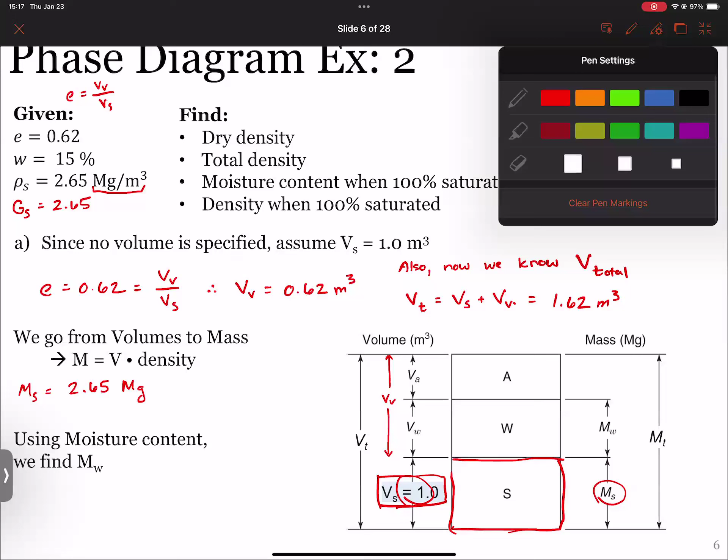We can find that one on that side, and then using our moisture content, we can find the mass of our water. Because now we know mass of solid, we know our moisture content is just the mass of our water divided by our mass of solid.

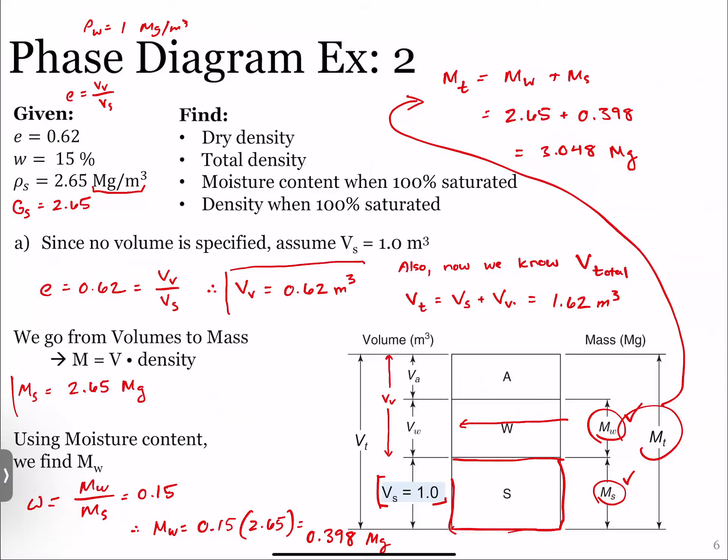So yeah, we have everything on the mass now. If we need to find our volume of water, what we can do is, since we have mass of water, we can go backwards to find the volume of water. Since we know our total volume of voids, we can then use this to find the volume of air.

Again, if all these equations and all this arithmetic gets confusing, just look at the arrows. Look at the arrows and see, okay, these two things add up to this one, or I can subtract this parameter from this thing to get the other thing. It's all just kind of visualizing there.

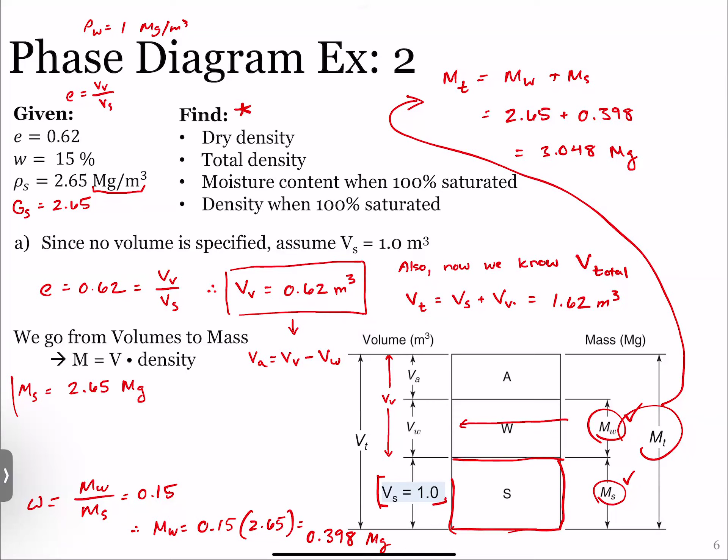All right, we have everything set up here. Now what we're going to do is find all of these values. So on the next page here, we have these all plugged in. Let's look at the dry density.

The dry density is the mass of the solid portion divided by the total volume. Physically what that means is there's no water, so the water is being removed from it. The only thing that has mass then is the solid portion, because the air, as already assumed, does not have mass in it. So this is once we take it out of an oven or whatever, we just ensure there's no water.

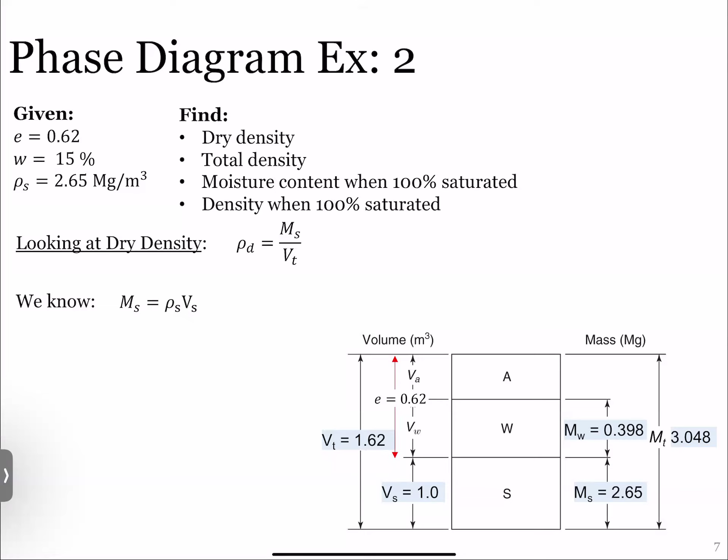What is helpful now is since we know that the mass of the solid portion is the density of our solid portion times the volume of solid, and since we assumed and made this initial step of the volume of solid being equal to one, this means that the total volume is really just one plus our void ratio.

So numerically, hopefully that checks out, but also looking at it here, total volume, if we look at this and the two things that are filled with this, we have our volume of solid and then our void ratio. So the total volume is just one plus this void ratio.

Now taking this portion here, all right, I have a bunch of arrows going here, and this portion here, we can say that the dry density is equal to this over one plus our void ratio. Of course, this is times one.

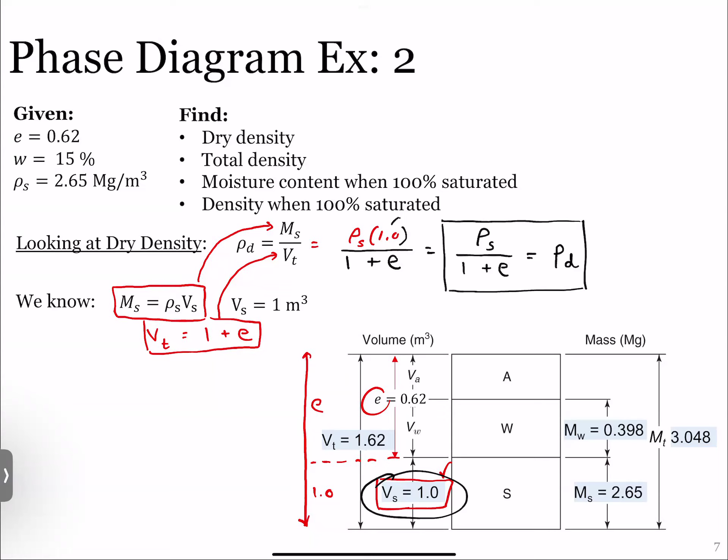So this is nice, this makes this relationship hold true here, where if we know our density of our solid portion, and we know the void ratio, then we can calculate our dry density through this. And this works either way, so this will also work for the unit weight, if we had unit weight instead.

So the cool thing about this, and next week we'll see, is like this value, the density of solid - how can we find this in the lab?

You put it in an oven, sort of - that would be for the dry density, to find the dry density. But remember, the density of solid is just equal to the mass of the solid portion divided by the volume of the solid portion. So it's basically the density of the rock, like quartz or the material itself.

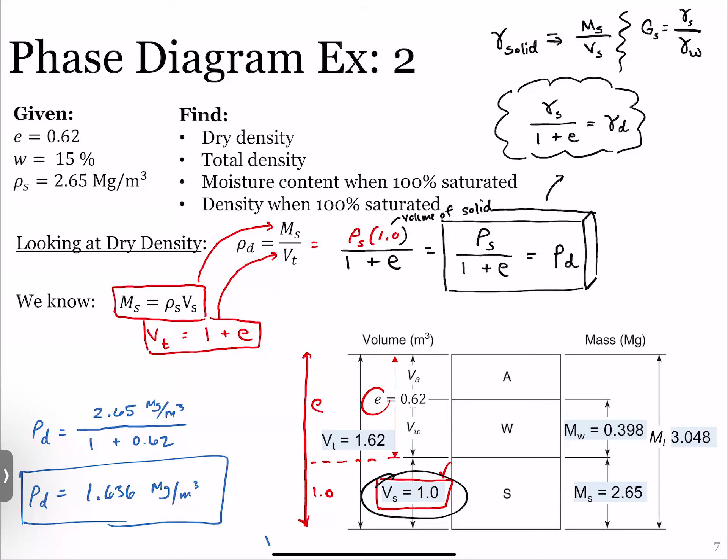That would be our answer for this. What you can see is there's an experiment out there to find or estimate the void ratio of soil, and there's also an experiment out there to estimate the dry density of soil. So you could be taking engineering time, using lab time, or you could do one - find the specific gravity of our solid and then estimate the other based off of that.

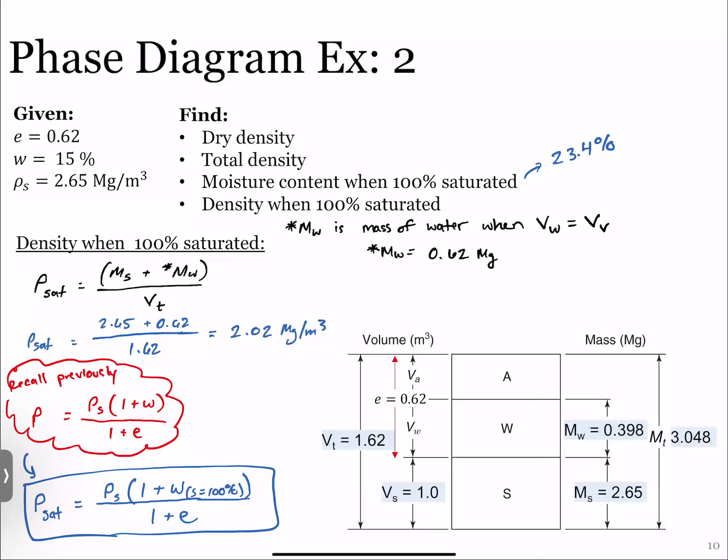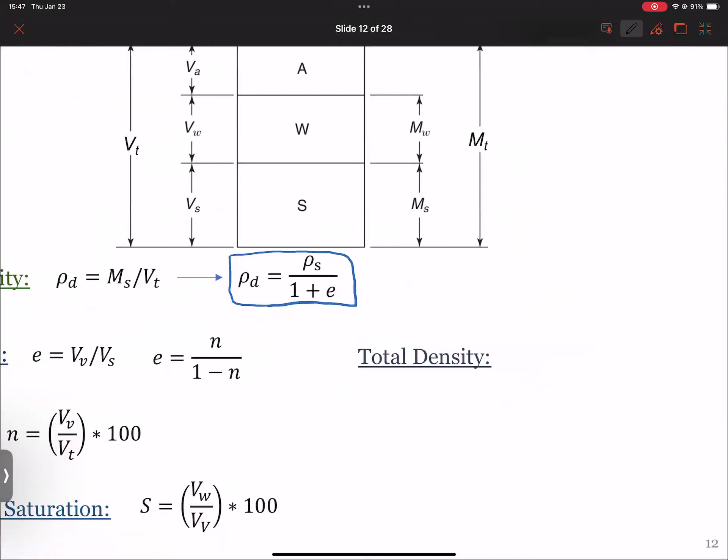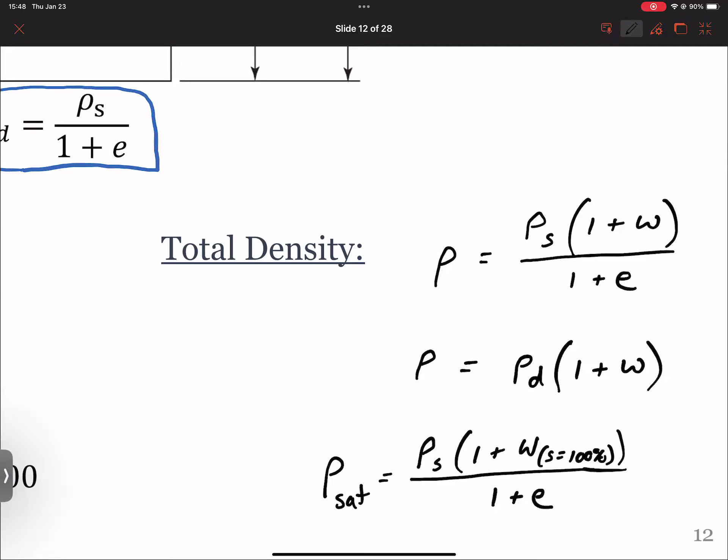And then we have a certain case if it's saturated. All we need is the moisture content in this specific case when it's 100% saturated, divided by 1 plus our void ratio. So these are some equations you can use as checks, or for quick calculations.

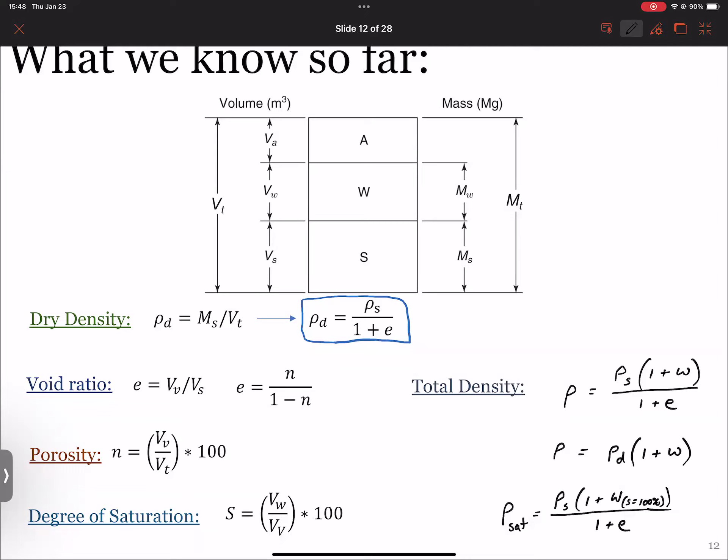Hopefully you can see a trend in some of these, like this is why moisture content is really important in soil, and this is why void ratio is really important in soil, as well as specific gravity, because specific gravity is used to calculate our density of solids.

So a few things I want to note about these equations though. The moisture content must be in decimal form for these to work. You can't put this in equation form or in percentage form, so it has to be divided by 100. Just get used to always doing that - like we do percentage to show, and then for calculations you divide it back into decimal form. The other thing of note too is this dry density.

It's basically that you can replace dry density with unit weight in this equation. And why can we do that? Because in order to go between the two, you just multiply by the acceleration due to gravity, that coefficient or constant, whatever you want to call it. But we're doing that on both sides of the equation.

So both sides of the equation, if we multiply the left side by 9.81 or 32.2, and we multiply the right side by 9.81 or 32.2, those just cancel out. So you can use these interchangeably here. All of these three equations, if shown in a row in a textbook or in my notes, just know you can use the density, or the unit weight, the gamma, as well.

So if we assume the volume of solid is equal to 1, this means our volume of void is equal to our void ratio. And I'd said before, like using density for the solid portion, then we can find the mass of solid, and then the mass of water too, using this. Here's the mass of water being equal to the moisture content times this.

So the degree of saturation, if we know that - okay, the degree of saturation - this is the volume of water divided by the volume of void. So we can rearrange this equation to show S times the volume of void is equal to the volume of water. Here we can just do S times the volume of void.

Now, right here, we said the volume of void is equal to the void ratio. So we can say that the volume of water is equal to S times our void ratio.

And we also have the mass of water being equal to - make sure I'm writing this correctly - yeah, so on this side of the equation right here, times the volume of solid. How we get between this and this is just the density of our water, or density of water, times S times E.

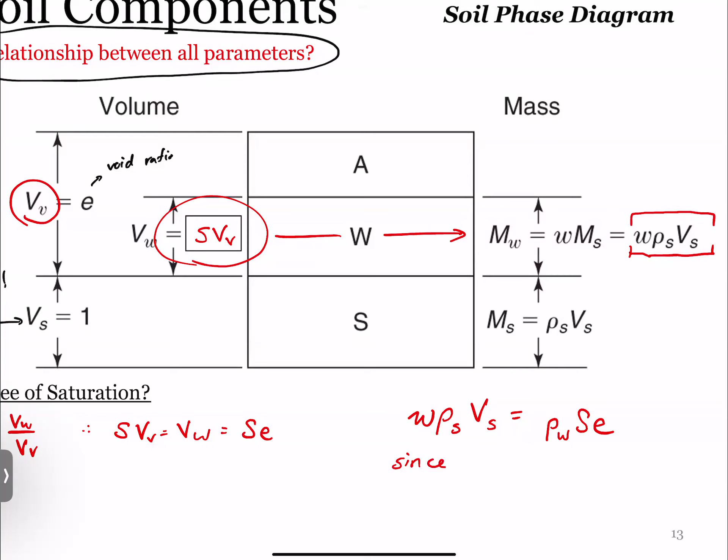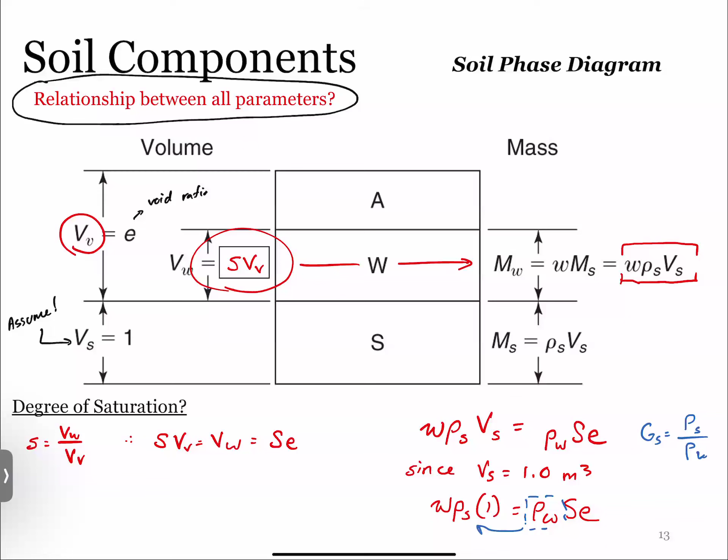So since our volume of solid was assumed to be 1, what we get is... the other thing that we know here is that GS is equal to the density of our solid divided by our density of water. Let's just go ahead and move this, or divide this over here - we can put that over there. Basically what we get, and I'm sorry guys, it's out of order here, I'm going to draw a bunch of arrows everywhere.

Basically what we get is this equation: specific gravity of our solid times our moisture content is equal to the degree of saturation times our void ratio.

This is the holy grail of equations in geotechnical engineering, which is why I love it, because it's the easiest looking equation ever. It's not some crazy empirical thing. What this allows us to do is estimate any one of these variables based off the things we know. By next week you'll know how to calculate two of these: specific gravity and moisture content. So we can easily find degree of saturation or the void ratio or any of these variables just through this correlation.

There's a few easy ways to remember it. Maybe you've already heard some of these, but I'll write them up here. In its current form, GSW is equal to SE. The way you can remember this is 'George Washington is equal to a soil engineer' - which might not be true, but I didn't know him, it could be true. George Washington, soil engineer, or the way I was taught it is this form: SE equals WGS, which sounds like 'sewage.' So that's whatever way is easiest for you to remember - George Washington is soil engineer, or sewage.

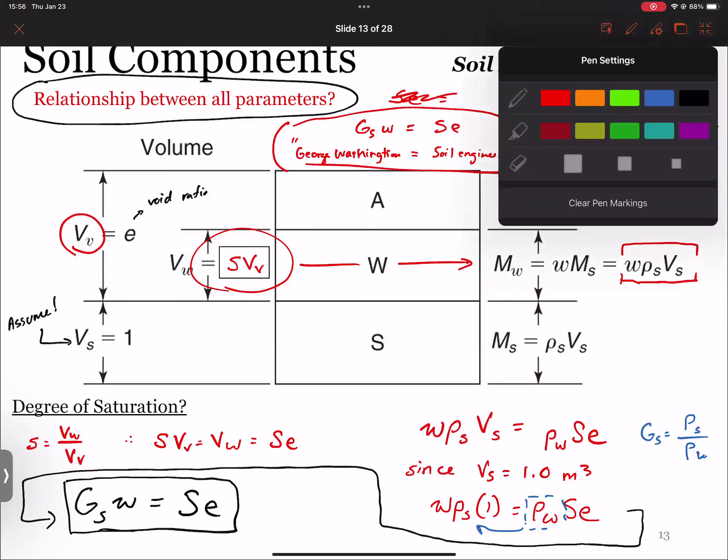The cool case of this too is - sorry, notes are all over the place - but if the soil is taken from below the groundwater table, and if you remember, we assume the degree of saturation is equal to 100%, which means in that case our void ratio is just equal to this, which is really nice because our moisture content is easy to find and our specific gravity is easy to find. If you look in our lab syllabus, we don't do the void ratio test, the ASTM for void ratio, because it takes a lot of time and is really difficult. So this is one of those shortcuts where if you have certain scenarios, like below the groundwater table where degree of saturation equals 100%, we can calculate the void ratio easily there.

No, the SE equals WGS is not given to you - I know it's a hard one to remember. What equation will be given on the exam? You gotta wait till the exam. No, I'll share a formula sheet with you guys for that.

What I will say - I keep showing this for a reason - these definitions are not going to be given to you. So you have to remember this, you have to remember that, you have to remember 4 things, potentially 5. But you're saying we need to remember them - you need to not just remember them, but associate those letters with what that means. Yes, which is why I think thinking of the physical meaning of it is going to be the best fit - like, what does it actually mean? Void ratio is tricky because it's two separate things, VV over VS, and moisture content.

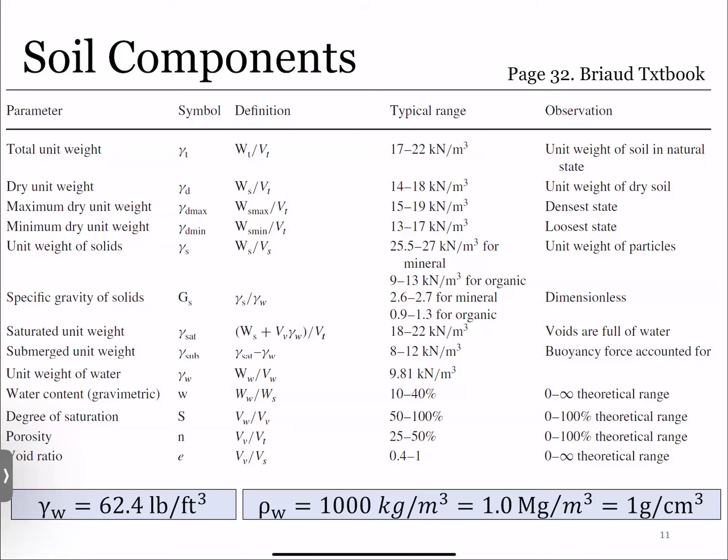So at the end of next week, I'll share example problems, additional practice problems for the exam, and I'll also give you the front page - I don't know if Dr. Islam did that or not, I think he just used my test, but I'll give you the front page ahead of time so you know which equations you'll have. Use that ahead of time - it's like, oh, I don't see this one, I should get used to memorizing it.

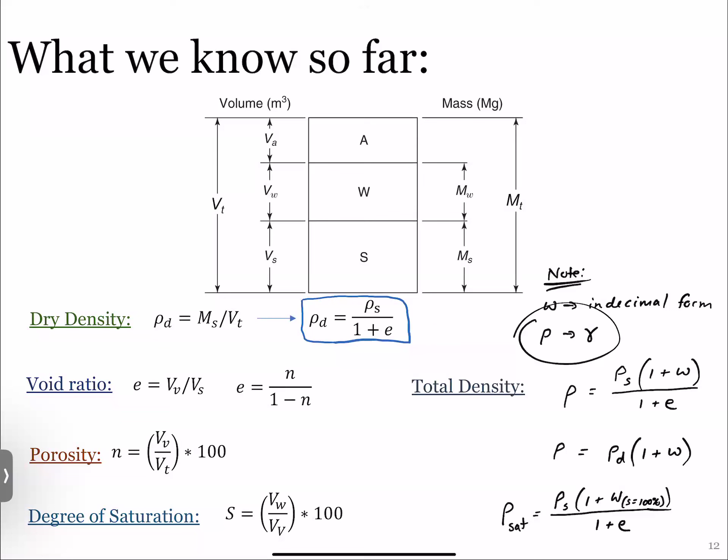Okay, but yeah, this one right here on the top right, this is never given to you in geotech because it's so easy to memorize - just memorize this using George Washington soil engineer or whatever. That's why if you look in the geotech lab, there's a picture of George Washington with a hard hat on - that's the genesis behind that.

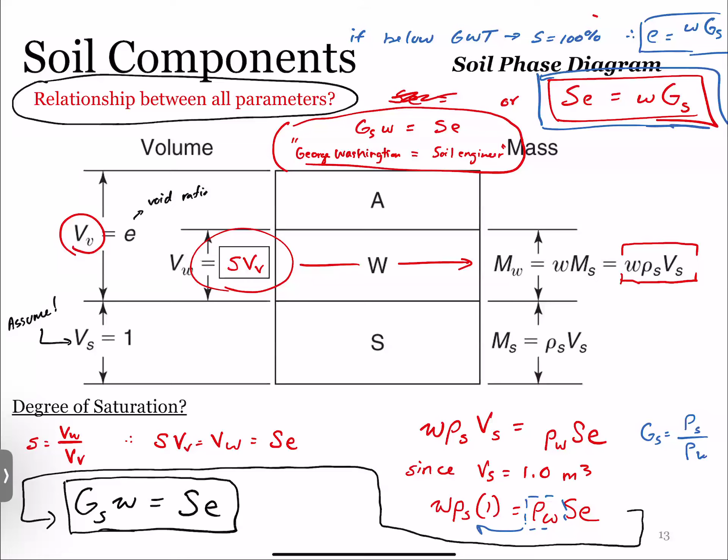All right, let's talk about void ratio now. So this is the next notes if you downloaded ahead of time, or if not, then we're caught up right here with the soil void ratio. Okay, so the void ratio is the volume of void divided by the volume of solid.

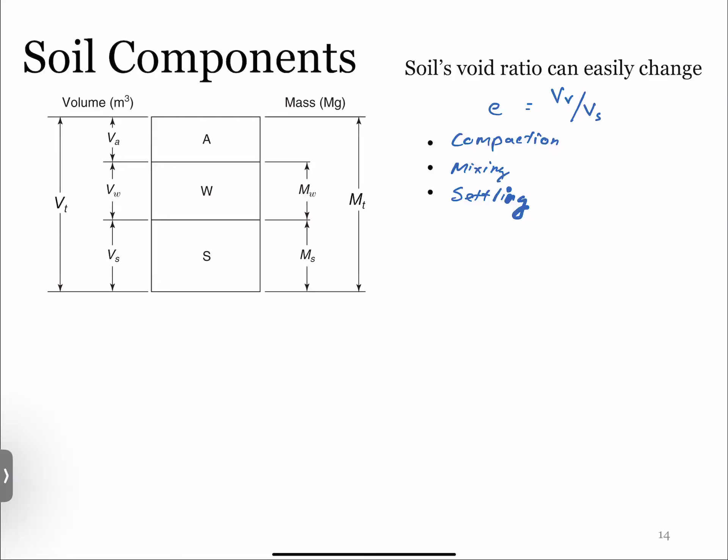At the very beginning, I said moisture content and void ratio are the two most important variables that we care about. Void ratio has a little bit more detail to it, even though it's just a simple index. It's related to a lot more of the geotechnical problems, like compaction, like soil mixing, and also some of the soil settling, or slowly compressing over time, where our structures are going to settle because we're loading them. So void ratio is a lot more related to the mechanics of loading, which is important. Void ratio is related to the actual mechanics of it.

So there's a way of expressing void ratio in terms of a value that's used quite often, and this is called relative density. Now it's really tricky because we've been talking about density and unit weight all the time, but basically what this is telling us is what is the current void ratio, or what is the current density, in terms of the max possible ranges that this specific soil can be compacted in.

So one of the things we often find is we'll find the in situ void ratio, so just normal void ratio. This is that in situ - if you remember, I use that fun word that means in place, or underground, or as is. But then we'll do a test and see what is the maximum void ratio that it would have, and then what is the minimum void ratio that it would have.

Now remember, with void ratio, it's one of those weird backwards kind of concepts where the maximum void ratio is corresponding to what type of density? Remember, high number of void ratio means what? Yeah, it means our volume of voids is up, which means our soil is loose or not dense. So our maximum void ratio is the soil in its loosest state, or the lowest possible density. And our minimum void ratio is in the most dense state that we can make it. So it can be confusing right off the bat because we think max, we think of the highest number or something, but really it's the lowest density.

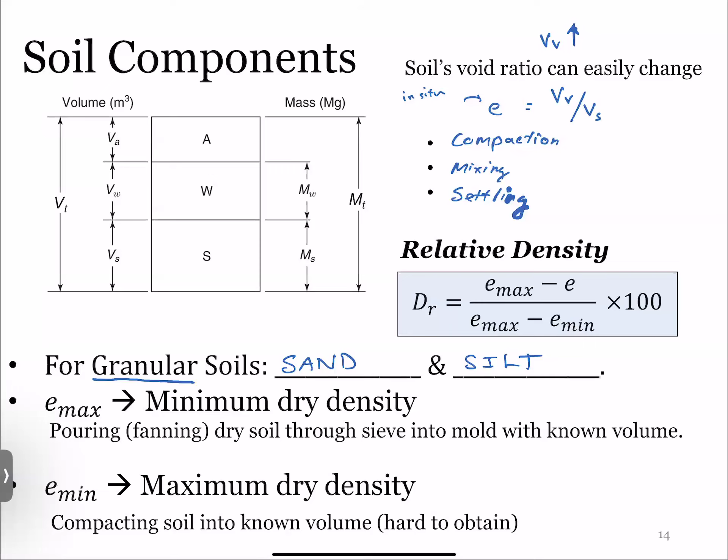So our relative density, it is also expressed as a percent. But it's a helpful percent because it's a true percent, and hopefully from this equation you can kind of see how it is that it's true. It's either 0 to 100%.

Physically, what it does, it tells us in what percentage is our current or in situ void ratio, or just normal E, in the range of possible void ratio.

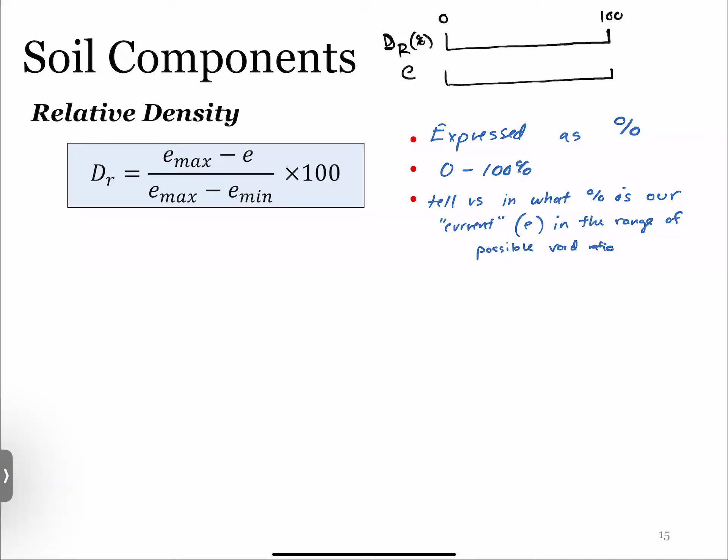So if it helps, think of it as a scale. We have some scale of relative density expressed as percentage, let's say 0 to 100%. This is directly related to our void ratio scale, where our E min is going to be over here and our E max is going to be here. It's also related to our density, where our density minimum is here and our density max is here. So it's just a way of quantifying, through 0 to 100%, the max possible compactions.

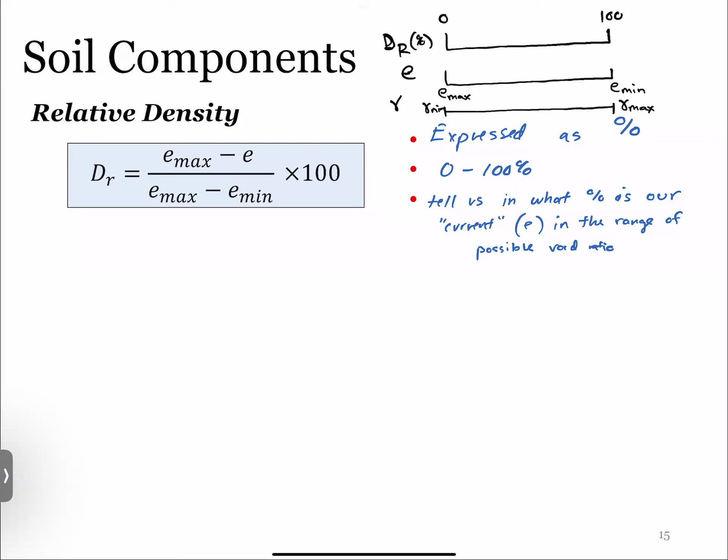Relative density is kind of like a category in those terms, where we have descriptive terms in the industry. So if our sand has a relative density of 0 to 15%, we would call this a very loose sand, or vice versa, 85 to 100% very dense. These are catch-all terms that geotechnical engineers use, so when we call a sand a dense sand, we're expecting somewhere between 65 and 85% relative density.

Hopefully this is making sense. Think of a well-rounded sand, like a bucket of ping pong balls, and you just fill that bucket up with ping pong balls. They're all rounded and all the same size, so there's going to be a lot of void space in there. Whereas if we had a bunch of angular material or bricks, they're going to be able to sit with higher contact areas, or more contact area, and have more mass in the same amount of volume.

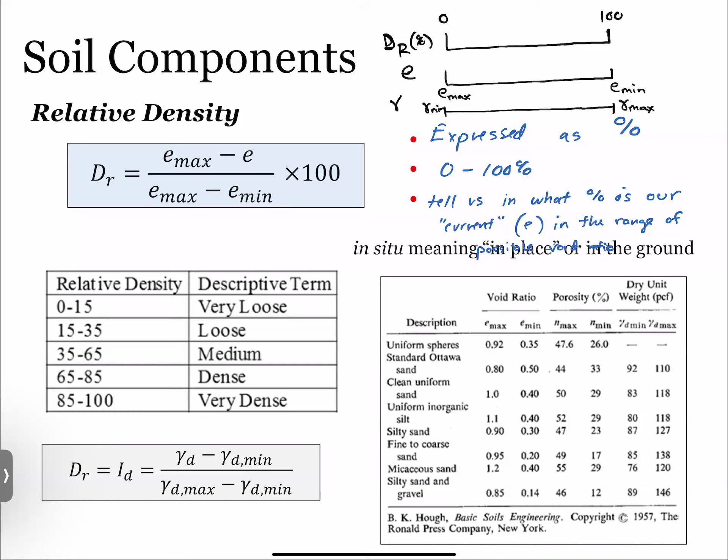This is why the angularity of soil, as well as the gradation of soil, is really important. You guys remember the term gradation from CE materials? No, you didn't take CE materials? Oh, that's weird. I don't know, maybe that's not for you.

Gradation is how the size of the particle is distributed. So as we scoop up this soil, are all the particles the same size? Are some particles small and large? In some cases they might all be the same size. It all depends on the geologic formation, the parent rock, all that stuff. So this is why we have these different ranges of void ratio.

So for our void ratios here, again, our min is our highest density possible, and our max is our lowest density possible. Essentially, why this range is important is it shows the potential of the void space to leave.

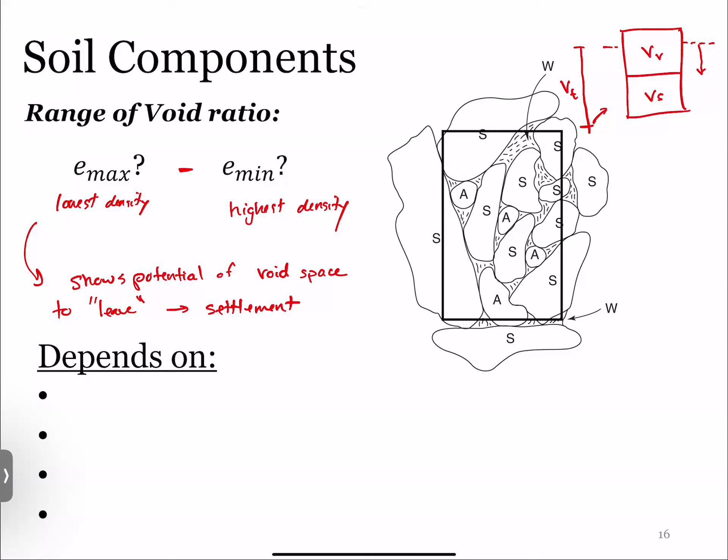This is a really important thing in the design of structures. We don't want to have this beautiful site all planned out, and then as soon as we build our heavy structure, the whole thing sinks down. That's called settlement, there are different types of settlement we'll talk about in a little bit. So this depends on multiple things: it depends on grain size, it depends on grain shape.

It depends on grain distribution, and it also depends on fine content. Fine content, for those who were in CE materials, is stuff that's below the 200 sieve in our stack of sieves. For those who weren't, this just means a grain smaller than 75 microns, which is 0.075 millimeters—really, really small material. This can greatly affect how our material will settle and move around.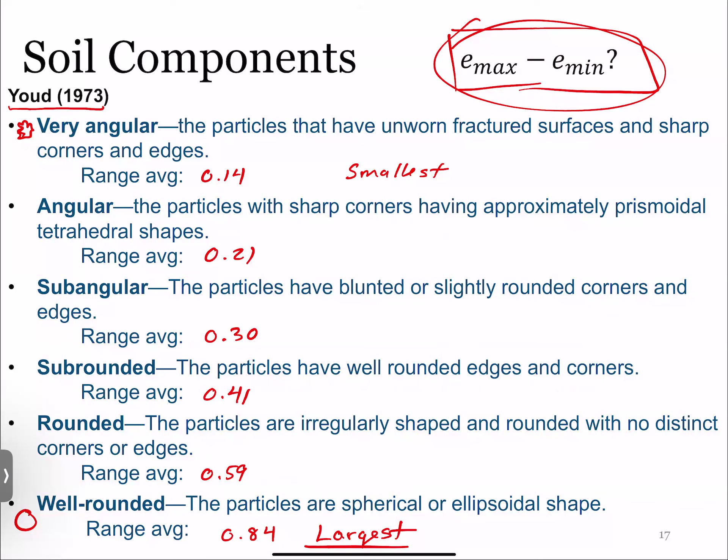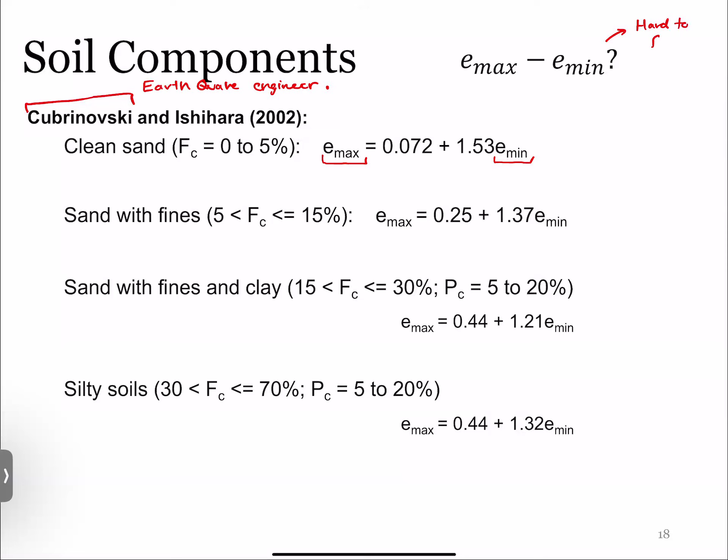So these people too—this is again just a correlation between some of the things. These guys, Cubrinovski and Ishihara, this is big in earthquake engineering, in California and in Germany or in Japan. They were able to find these anticipated ranges where if we have E max, then we can calculate our E min, because remember, our E max is somewhat easy to find in the lab—there's a pretty standard method for it. Our E min is very difficult.

So these are for different types of sands here, and this FC is fine content, which means percent passing the number 200 sieve, or the percent of our soil that is smaller than 0.075 millimeters in size.

You'll also see this right here, PC. PC is the percent smaller than 0.005 millimeters, so much, much smaller. This is called our clay fraction.

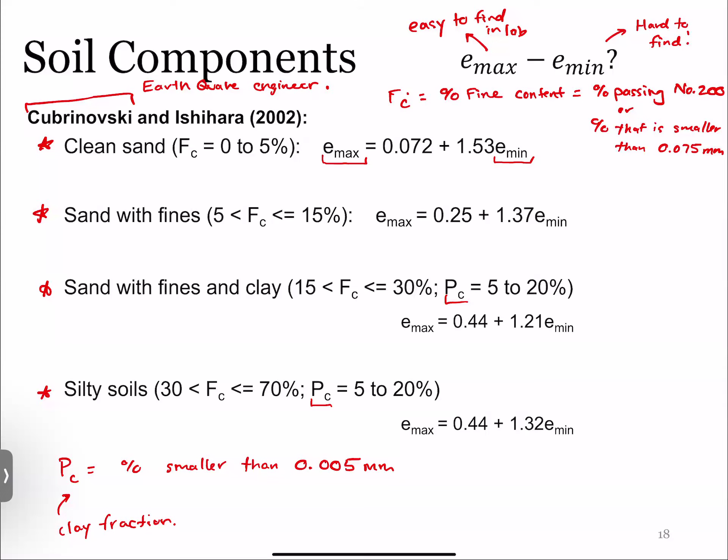All right, the last slide I want to show, and then we'll be done with this section at least, of why this is important. This is one of those correlations of the void ratio range and the mean grain size, which is from our gradation test. I don't know why this isn't here, but hopefully on yours it's actually printed out—one of these empirical relationships.

This is an empirical equation, and you can kind of see, you remember from math, how this fits. You have all this actual data—that's what these little data points are. Actual measured data, and then you use a statistical function to fit that data, so then you can use it as a prediction tool.

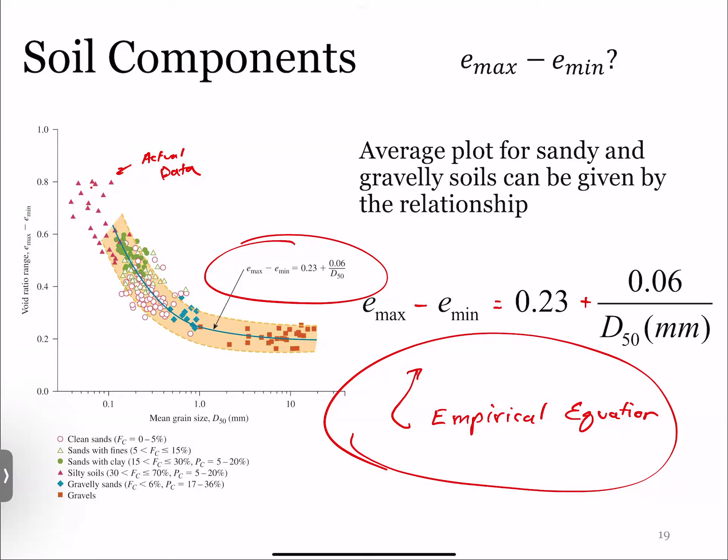Okay, so at least we got through a good chunk of it. We'll talk about submerged density and its physical meaning, and then get into some of the grain size distribution stuff next week in prep for exams and all that stuff.